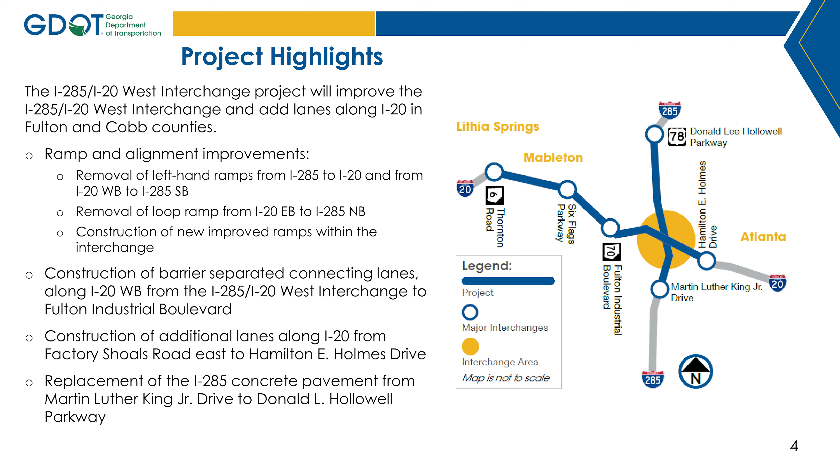So this is what we call our stick map. That's kind of the very basic one that explains the project limits and where those roadway improvements are happening. But if y'all really want to know what it's going to look like—I'm a visual person, it's so hard to understand what it's going to look like when it's done—the project website, as well as GDOT's YouTube, and we'll have links to those later, have the visualization that flies the entire corridor, north-south and east-west.

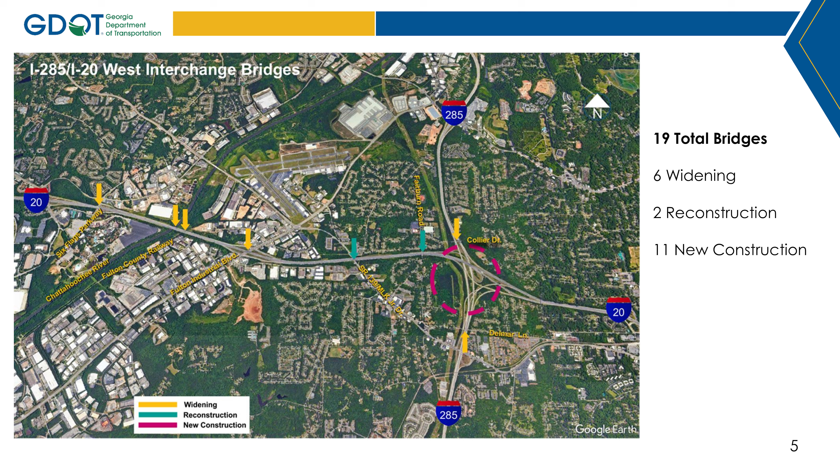So as we discussed, there's a lot of bridges here: 19 total bridges that are being touched. 6 will be widened, 2 are going to be reconstructed, and 11 are new construction bridges. Of course, bridges are kind of the star of the show here, but we have a lot more happening, and you can see most of them identified here. They're pointed out in yellow—those are the widening bridges—and then the reconstruction bridges are in that teal color. Right there within the interchange, that dotted circle shows the interchange proper.

So again, just a little bit more detail about what we're doing. We've got the 19 bridges, there's 18 proposed noise barriers. Now, proposed is kind of the key word here, because until the community votes and says yes, we want these in our backyards, they're just proposed. But that's something we'll get to coming up in the next year, and we'll have more information as we get to our community meetings and information directly for those voters. We'll have 54 retaining walls. And again, we talked about the impacts that are east-west and north-south: it runs about 6.5 miles on I-20 and 2.5 miles on 285. With the number of bridges and ramps that'll have 2 lanes, that comes to about 70 lane miles of improvements.

And we do also, throughout the year, if you follow GDOT social media, try to drop a little bit more information about things like the amount of concrete or rebar.

There really is a lot that goes into getting all of this project built. So, there's always the question, why are we doing it?

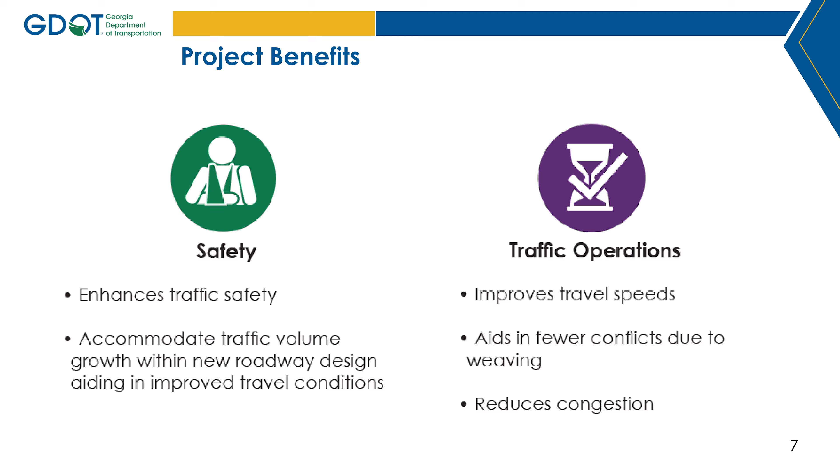Safety, of course, is top of mind. The project aims to enhance safety by making these more direct connections. You'll see less weaving, people won't suddenly be going from the right lane only to find the exit is on the left. We're not crossing five lanes of traffic anymore.

We're getting back into a regular cadence of how you exit the interstate or make the connection to the next one. And then operations: we know there are some slowdowns here with those loop ramps, when talking about how to access where you're going from 285 to 20. There's slowdowns, and there's slowdowns with freight. This new design and configuration will improve that and allow people to keep moving, trucks to keep moving, and fewer conflict points between all vehicles, especially passenger vehicles and freight vehicles.

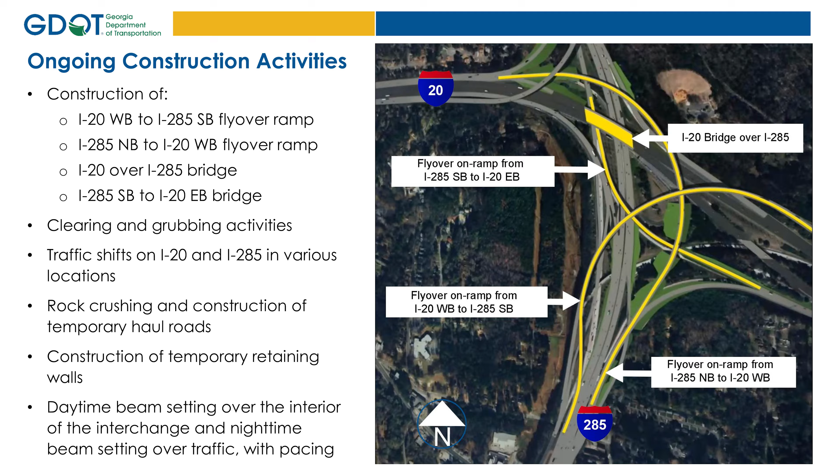So the way that this works, we've got a really cool video to show y'all, we're really proud of this one. The crews bring beams in, stage them along the interstate, and they only have 15 to 20 minutes to get those in the air and get them placed where they're going to eventually be, and will become the driving surface for the new bridge. So if we can get to the next slide.

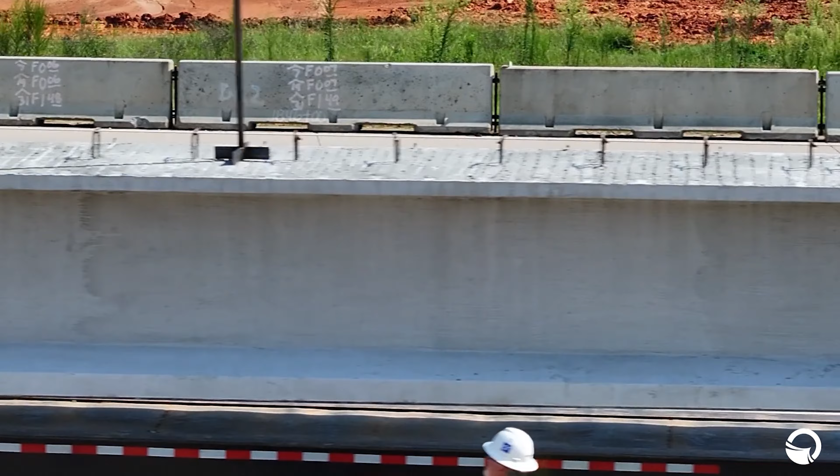Hey, Georgia motorists. Today, we'll quickly explore how crews safely set beams for a new bridge. This work activity happens during the construction phase of a project and is one of the most critical phases of construction. Upon the beam's arrival, crews work together to secure the work zone.

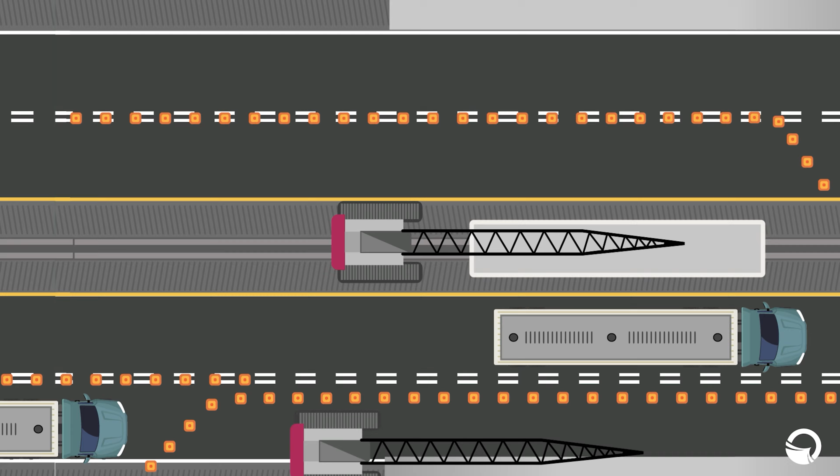Once the site is secured, trucks carrying the beams arrive in sequence. Before the first beam is lifted, traffic in close proximity is temporarily slowed down. These traffic pacing holds typically last up to 20 minutes at a time, allowing for crews to move beams over the roadway safely.

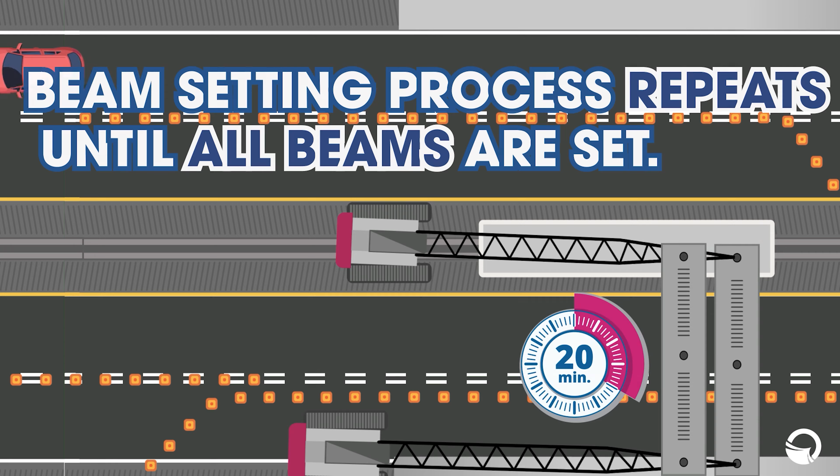Crews conducting the crane will slowly lift the beam off the truck and move it into its designated position with assisted guidance from other crews along the beam structures. This process repeats until all beams are in place and helps maintain a predictable pattern so both crews and drivers know the sequence.

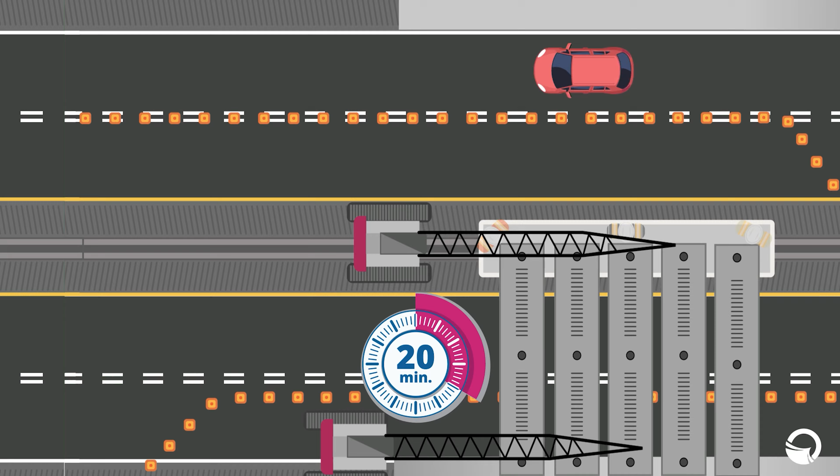Once all beams are set, crews will perform final checks, verifying connections and alignment before demobilizing the crane and opening traffic fully. And that's how it's done in 1 minute.

But of course, these take 20 minutes. They're about 20 minutes where traffic is slowed. And then just over several weeks or several months, the crews have been working to get these beams up.

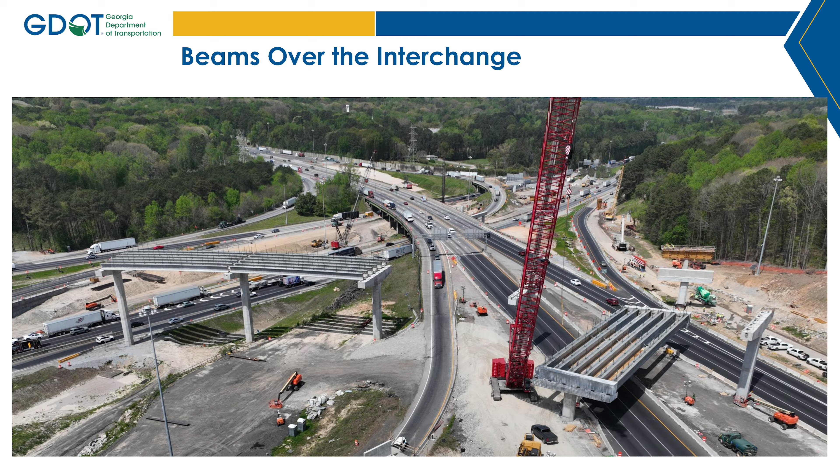So this is looking west, or kind of about northwest, from the interior of the interchange. And you'll see where these beams are going in and starting to go in over traffic. And there's one of the cranes there.

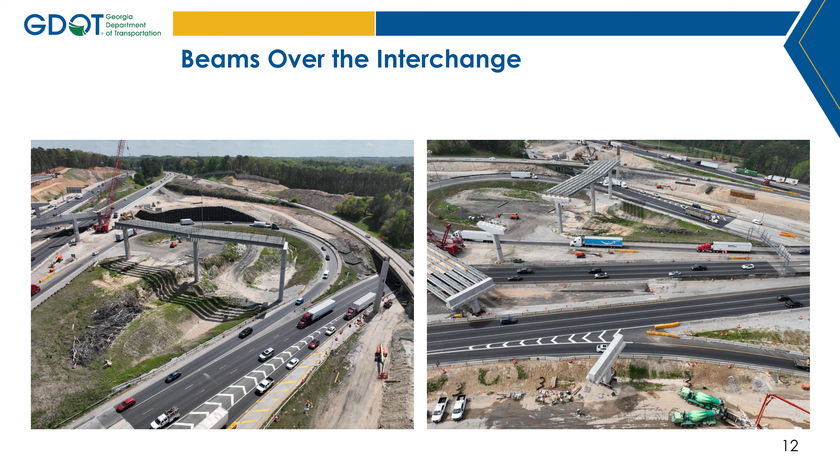And then the next slide, it's essentially the same view, but from a different direction. So we can see where some of those connections between 20 and 285 are being made. And now I'm going to turn things over to Chanel for a little bit of additional information.

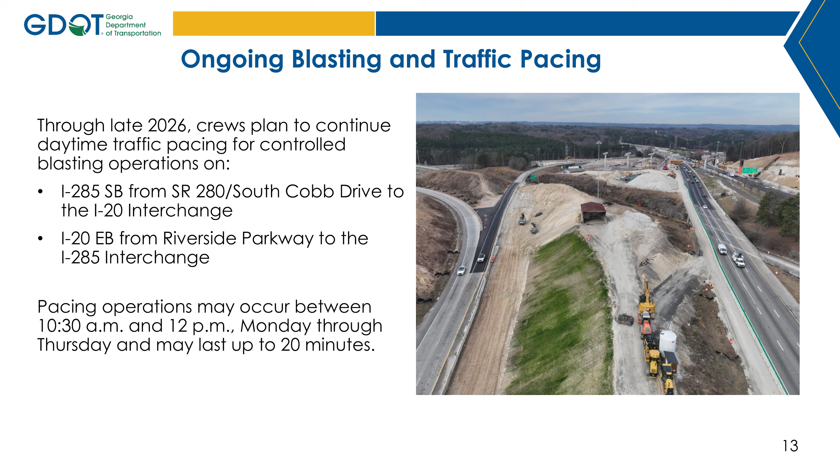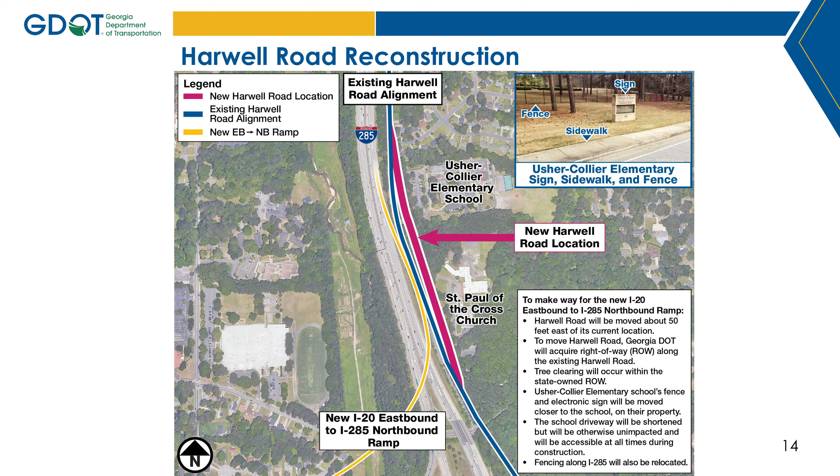One of the other major activities for this project that takes place outside of the interchange is the relocation of Harwell Road. In order to make room for the new 20 eastbound to 285 northbound ramp, Harwell Road needs to be shifted to the east approximately 50 feet. The developer's phasing plan allows Harwell Road to remain open while this relocation takes place, but it'll remain open to pedestrians and drivers, and the active construction zone will be barrier separated.

Now, as a part of our environmental commitment, the developer has a workforce development program that includes on-the-job training. We have a goal to have at least 10% of our workforce be residents of the project limits. All openings for trade and support roles are listed on the contractor's website, and you can access it by the QR code on that pamphlet.

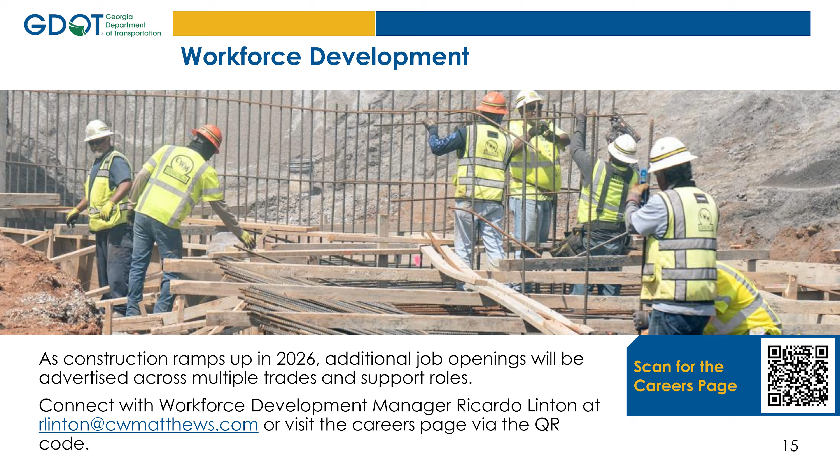This project has a very robust outreach plan to make sure the community has avenues to stay engaged and informed. You can sign up to receive our weekly email sendouts, including traffic impact reports every Friday. We also send a monthly project newsletter with construction updates, ways to contact us, safety tips, fun facts, and a photo or video of the month. We also host quarterly community meetings to give you updates and answer your questions.

Would this be the same website we can check for lane closures? I've noticed a lot every weekend we're having lane closures and things like that. So would this be the same website to check?

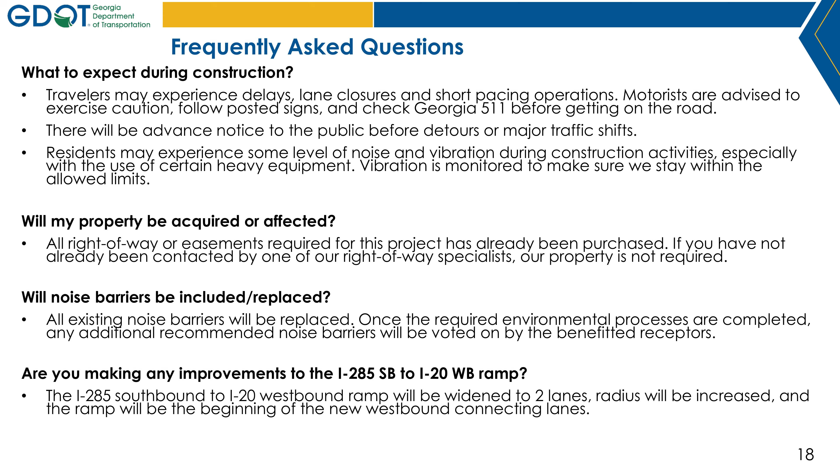Are we making any improvements to the 285 southbound to 20 westbound ramp? If you take that ramp, you know that it's awful. Yes, we are making improvements in 3 major ways. First, we'll be widening that ramp from 1 lane to 2. Second, the radius will be increased, meaning the curve won't be as sharp. Third, that ramp will be the beginning of the new connecting lanes Courtney was talking about, giving you a stretch of roadway that'll allow you to come up to speed before merging left to continue going 20 west.

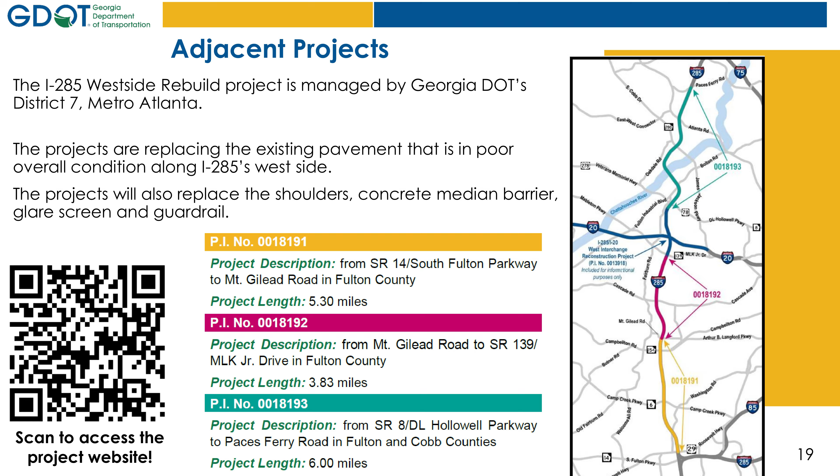And that's all that I have, so we can open the floor for questions.

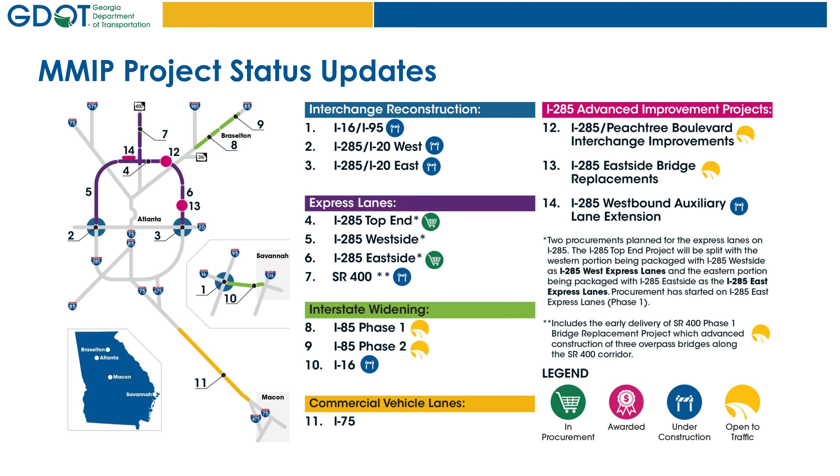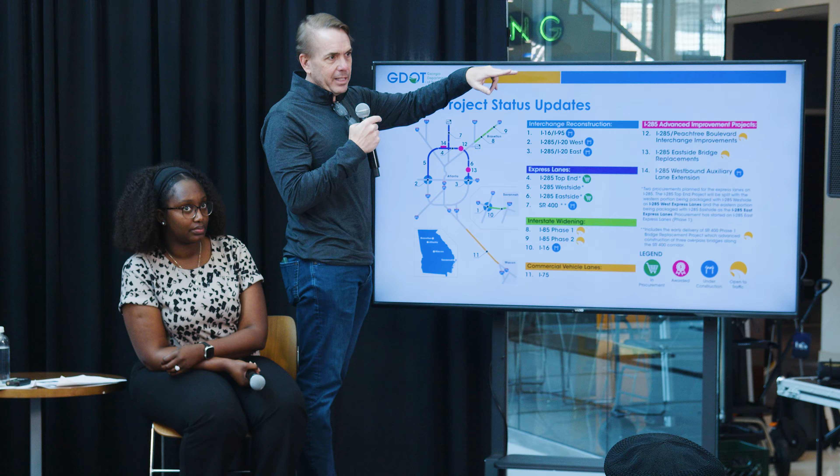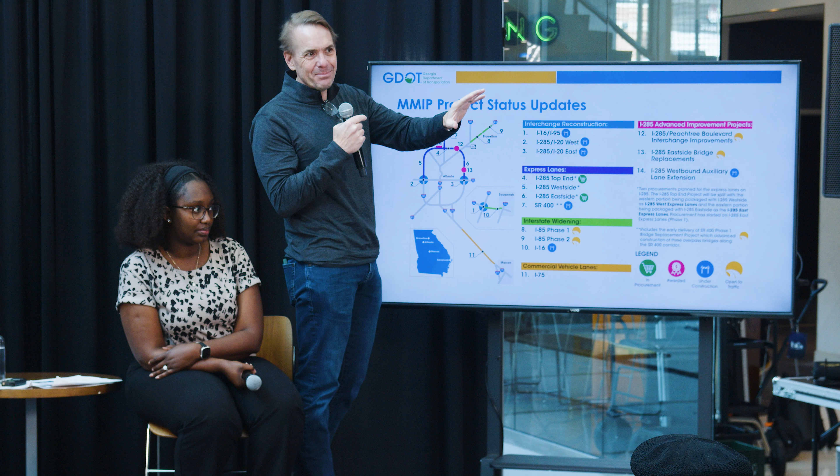So the ultimate plan - there's a lot of projects in here, but the biggest part is bi-directional express lanes in both directions on 285, from I-20/285 on the west side, all the way around the top of Atlanta to I-20/285 on the east side. So it's like a flyover - elevated lanes on both sides. Now that's subject to final design, okay? Because in final design we try to get as smart as we can, right? So we take the concept and finalize it. So who cares about that little pesky thing called physics - no, just build it. So that is the ultimate plan.

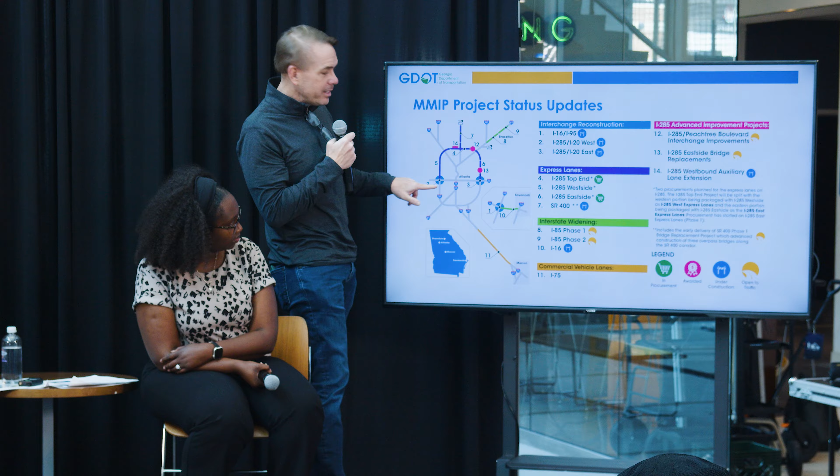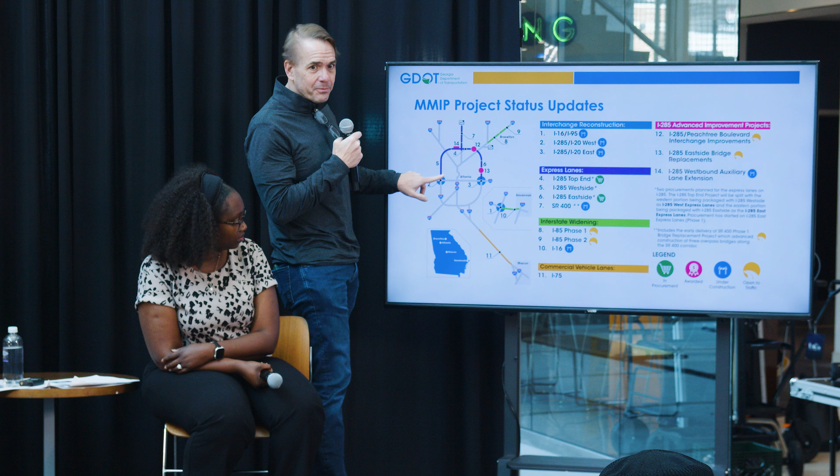This project on the east side will go first, followed by the project from 400 around to the west side. These two interchange projects, while significant in themselves - this interchange project on the west side is the second largest road project in Georgia's history. Oh wow, it's very large. But they are the projects to prepare for the express lanes, and these projects are in procurement, planning, and engineering as we speak - they're well progressed.

Very good. Thank you. Oh, we have one more question over here on the other side of the room.

Hey, folks, panel, thank you again so much for all of this wonderful information. I would also say to our audience, situations like this are a great opportunity to make sure we are involved with our local elected officials and in our civic process. We all have to pay attention to what is happening, who represents us, and how your voice gets to smart people like our esteemed panel here today, so they can provide that input to the subject matter experts, as Courtney said. That is how your voice gets heard in situations like this. Thank you everybody for being calm, peaceful, and orderly, and not throwing everything at these three folks, because they are delivering the information we all need, so you can hold your elected officials accountable for these types of questions we may have.

And thanks again for your presentation. I'm not sure if you guys can speak to this, but can you talk about GDOT's policies on electric driving and self-driving vehicles? Is that something you guys can speak to?